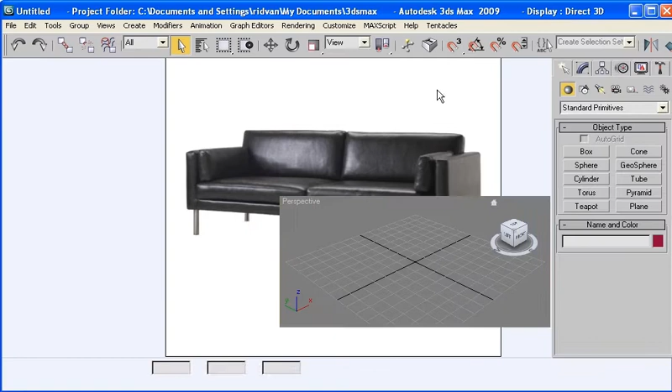I'll come here and open up 3ds Max, and let's start with the box like so. I'll go ahead and click on the box, and then from the top view, I'll make something like this. There it is. So here's the base.

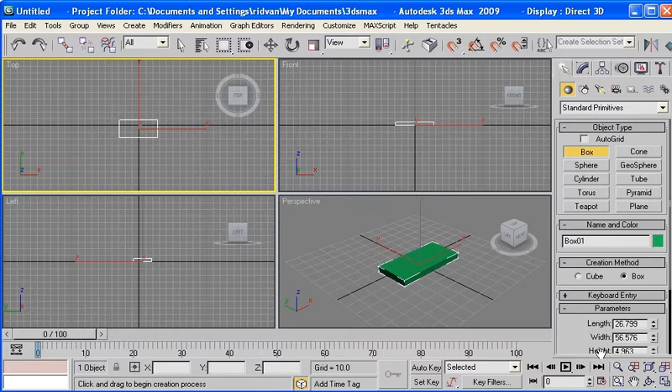So now let's go ahead and zoom in all of the viewports like so. And then I'll come here on the modify tab and add more segments. Let's go ahead and add, keep looking at the top view. I'll add 5, and then I'll add 6, and on this one, I don't need as many, maybe 4 like so.

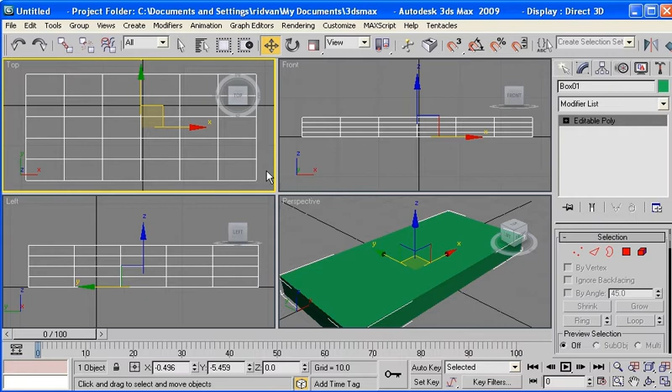Okay, so now we need to extrude on each side, so I'll come and convert this into an editable polygon. I can right click and say editable poly like so, and then I'll come and adjust the vertices to where I want to.

And let's go ahead and say that's what I'm going to extrude. Let's actually move them at the same time for this way and this way. So with the scale tool, I can move them both like this. And I'll also move this up a little bit.

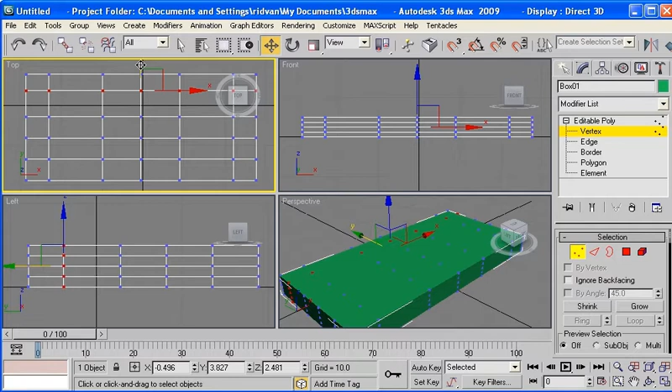There we go. Here it is. And I can adjust these to where I want to. And let's actually move them even further like that. There we go. As a matter of fact, no, let's leave them like that.

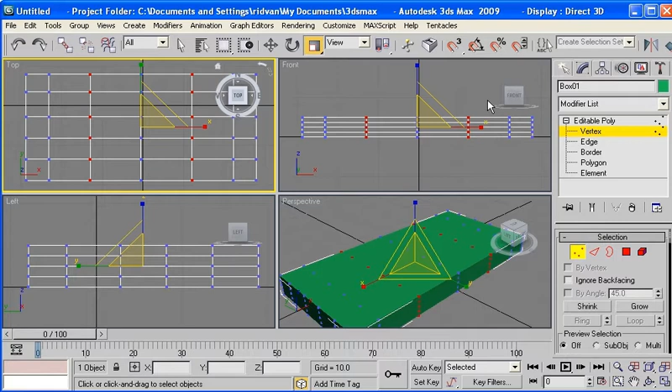Okay, let's go ahead and apply the extrude first. So I'll go ahead and click on the polygon, and I'll select these faces. I'll select that. Hold Control when you select more than one.

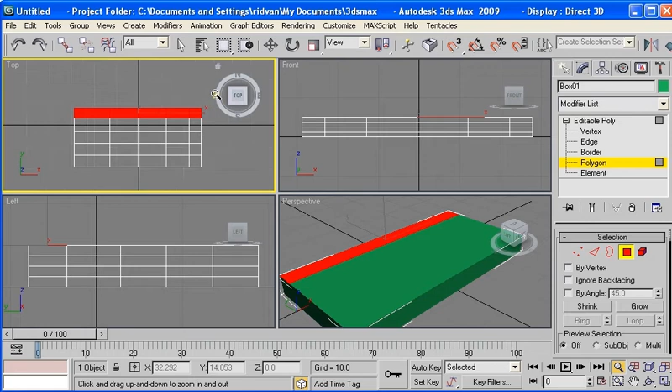This is the top. I'll zoom in. I accidentally clicked on the wheeler in here, so I'll keep selecting the faces that I want to extrude, and here it is.

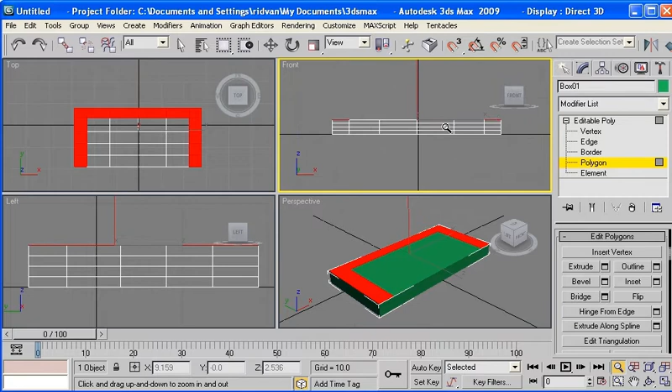So now if you look at the perspective view, I can come here and go under modify and scroll down and say extrude. Let's zoom out a little bit, and I'll go ahead and extrude next.

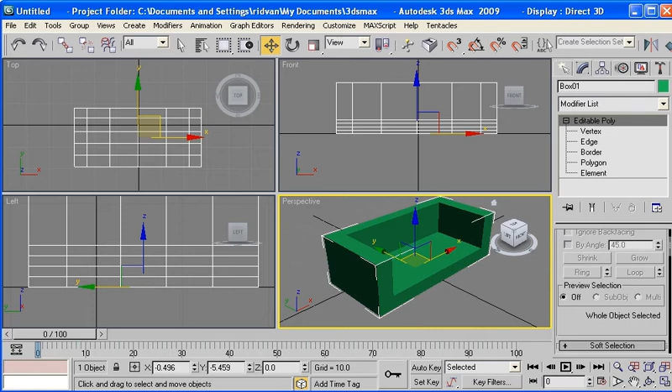So here it is. So again, we're trying to create the base in here before we create the cushions. So come back here. Now I need to make those smoother, so I cannot just turn the NURMS on, because this is what happens. If I come down here and say turn the NURMS on, that doesn't look good at all. So this is what we got so far, and I don't want that.

I want these to be a lot more smoother, and the edges are not really the way we want. So I'll go ahead and turn that back off.

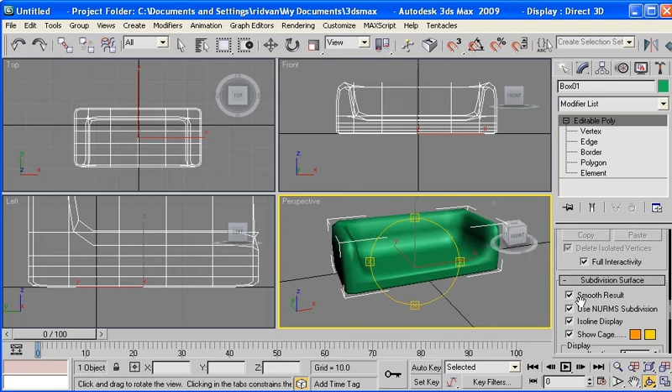Now in order to get those edges the way we want, again, remember from our last session, on the iPod we have to add more vertices. So what I'm going to do, I'm going to maximize the front view, and I'll come down here, and with the quick slice tool, I'll go ahead and add more slices in here.

So let's deselect, and then use the quick slice tool one more time. Where is it? There you go. If you scroll down, quick slice. This will add a set of vertices across our shape in here.

I'll add one more in here. Okay, I'll also add one more in here. Perfect. I'll do the same thing for this.

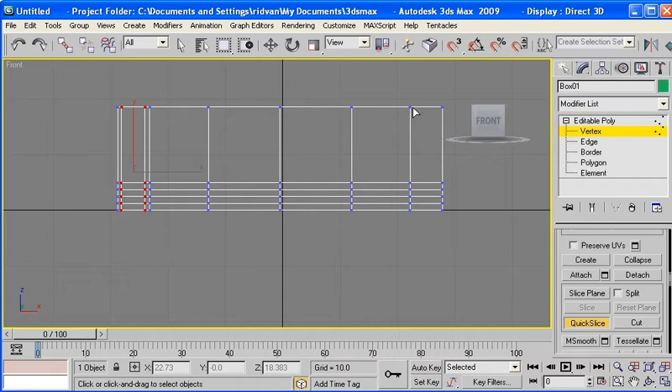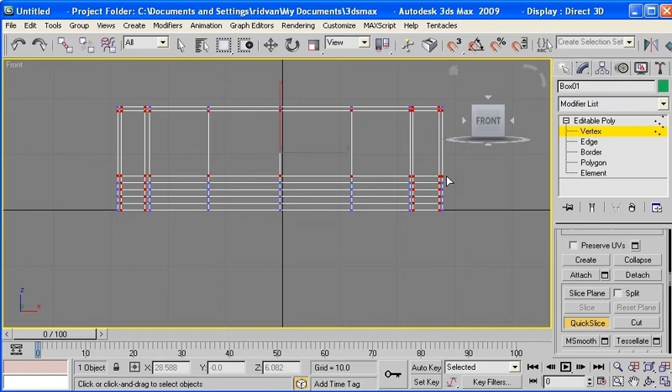Okay, I'll also add one more across like this. Let's undo that and do it one more time. So click here and add one more across, and also add one more across.

Like this. Okay, so let's go on and apply. Let's see what we got so far. If I go ahead and apply NURMS, okay, let's take a look at what we got. That looks a lot better than what we had. So the difference between the old one and this one is very obvious.

Now we can also adjust these. See how they don't look that good in here on these corners. So we can add more vertices in here and make them look a lot better. The way you can do that is if you go to the front, I'll come back here and add one more set of vertices on the other side. There we go. Same thing for this side.

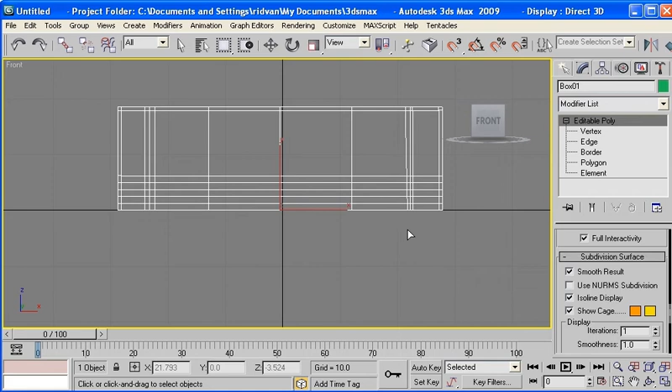Okay, turn the NURMS on again, and let's take a look at that now. So that looks a lot smoother right now. You see that? Okay. So that looks pretty good. Let's go ahead and change the color to black.

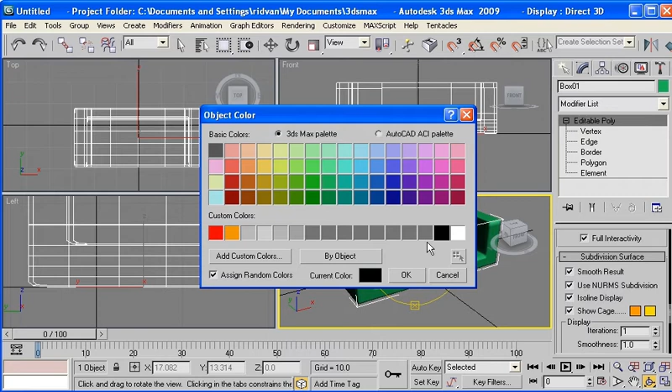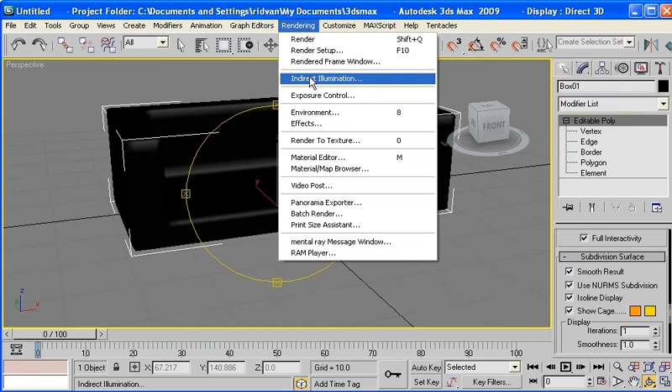On the default light, we're not going to see much of a contrast, but we should still see some. And let's actually make the environment—I'll go ahead and change the environment and make that white. So environment, I'll go ahead and from dark, I'll make that white.

And now let's go ahead and do a render. So we can see this a little bit better. It's not that clear though.

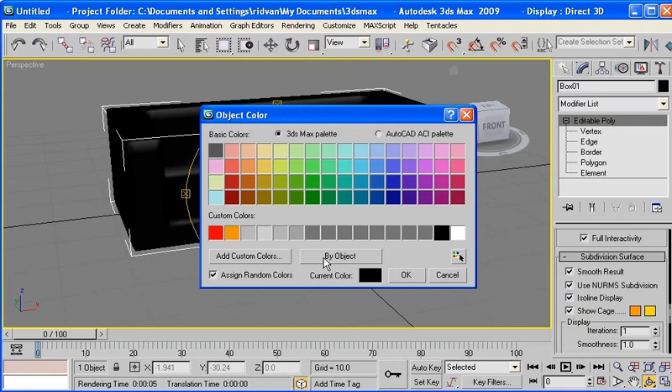So maybe we can make it, let's see, add a custom color. I will not make it the old black, I'll make it a little bit gray probably. Add a color, let's do that. Okay, let's apply this color. See how that looks. So we can see this a little bit better when the light hits. Yeah, this is much better.

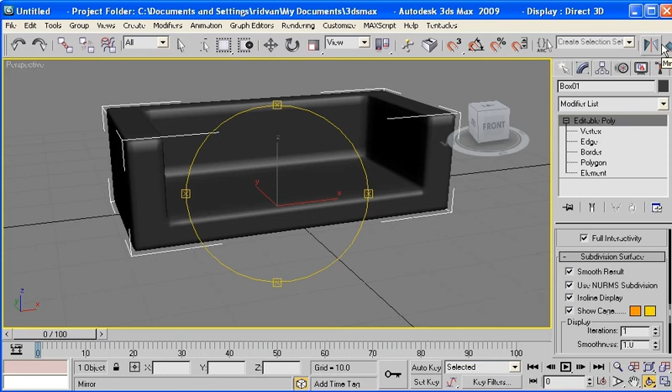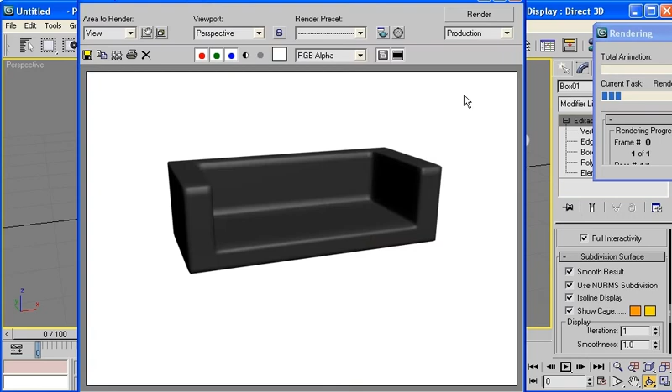We're going to change the render, so it does not render with mental ray. So I'll come here and go to the default render. This will render a lot faster because we're not applying any lights right now. So I'm going to go ahead and leave it at a default render, and I can go ahead and rotate at a different angle and see how that looks.

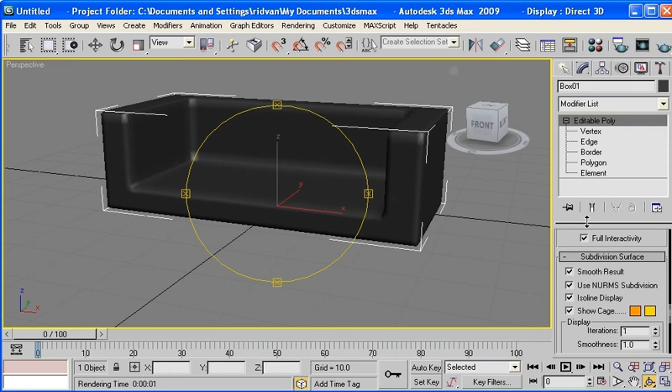Okay, that's not bad. We can make these a little bit thinner if you'd like, because if you look at the image in here, they're not as thick, so we can make these a little thinner. And they're a little smooth as well, so we can play around with that. So I can come back here and turn my NURMS off, go to the front.

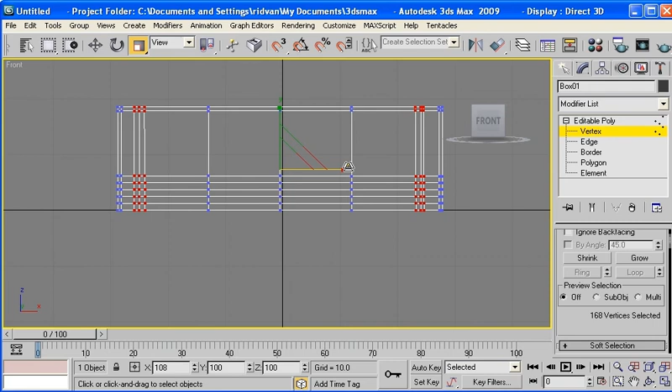And I can simply move the vertices. So I'll click on the move tool. I'll select these set of vertices, also select these, and move them away from each other. There we go. So this will make the edges a little bit thinner.

There we go, let's do a render of that. So these are a little thinner like so. Okay, and if you want to make these a little smoother, like you see them in here, they are a little smoother on this edge, on this side, then you can just play around with the vertices and make them a little smoother. Okay, so that's up to you.

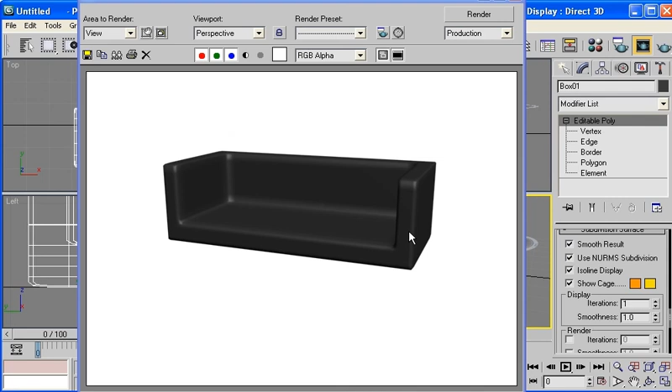Let's see how this looks from the top like that. Pretty close to what we want, so that's great. Now let's change the shape of this. I'll do something like this.

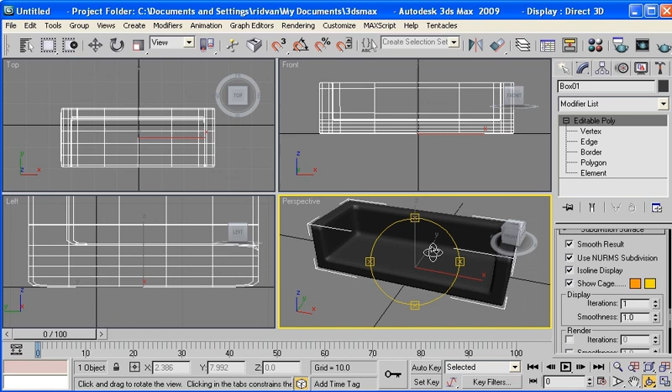I'll make this a little bit bigger like so in this direction. It's pretty close. Okay, we'll render that. Okay, so that's pretty good.